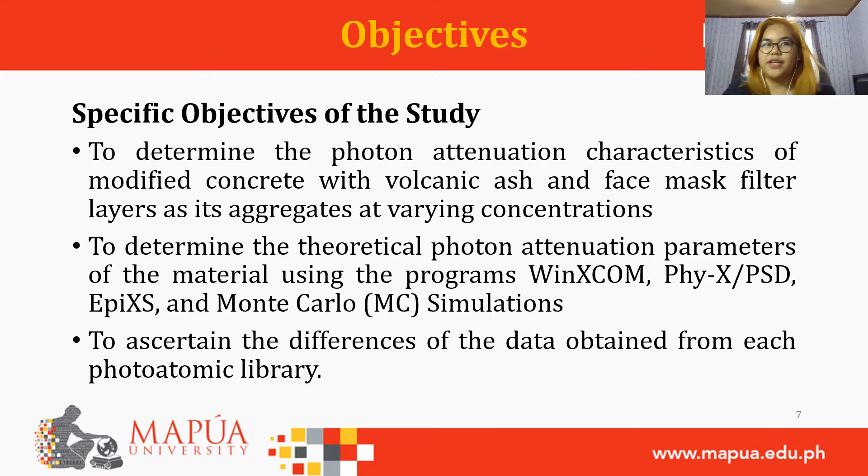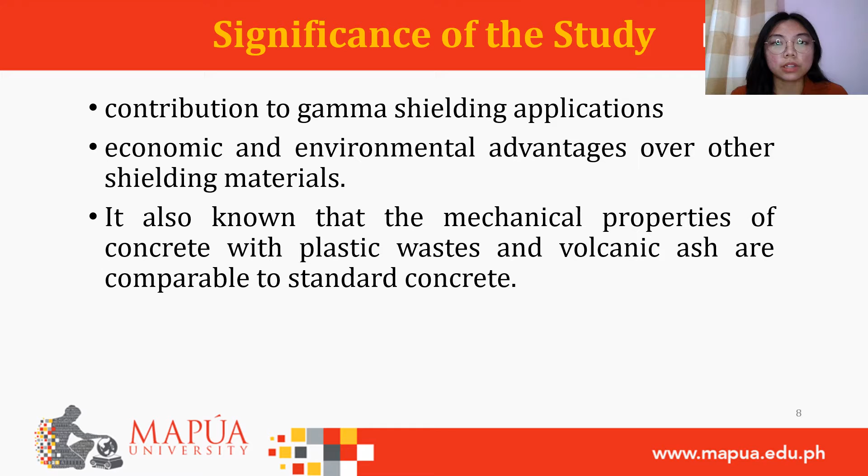This study will have contributions to gamma shielding applications such as in medical and research facilities, due to its economic and environmental advantages over other shielding materials. It has also been proven by previous studies that concrete with plastic wastes and volcanic ash are comparable to standard concrete. Recycling the masks and volcanic ashes will also be beneficial to reduce wastes.

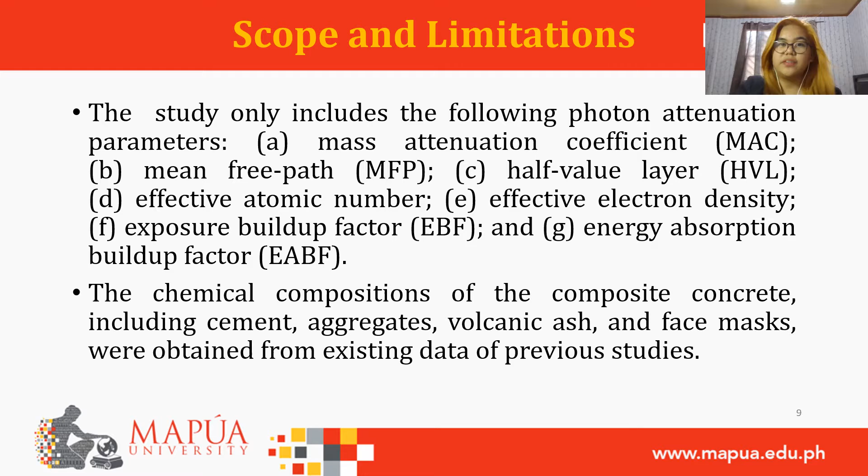The study will only include the parameters shown in the slide. Because of the restriction due to the pandemic, the chemical composition of the proposed material will only be based on the data obtained from previous studies.

The photon attenuation parameters of a material will determine its capability for photon shielding. The parameters are the mass attenuation coefficient, mean free path, half-value layer, effective atomic number, effective electron density, and energy and exposure buildup factors.

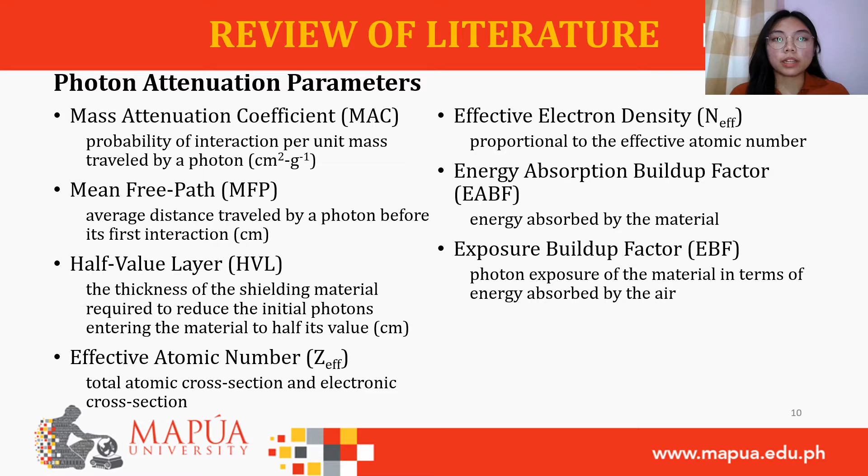In light of the prevalent use of face masks, Kilmartin-Lynch and others investigated the mechanical properties of concrete with face masks. Results showed that increasing the face mask in the concrete mix will increase the compressive and tensile strength of the concrete. However, this is only advantageous up to 0.2%, as there was an observed decrease in strength beyond 0.2% face mask.

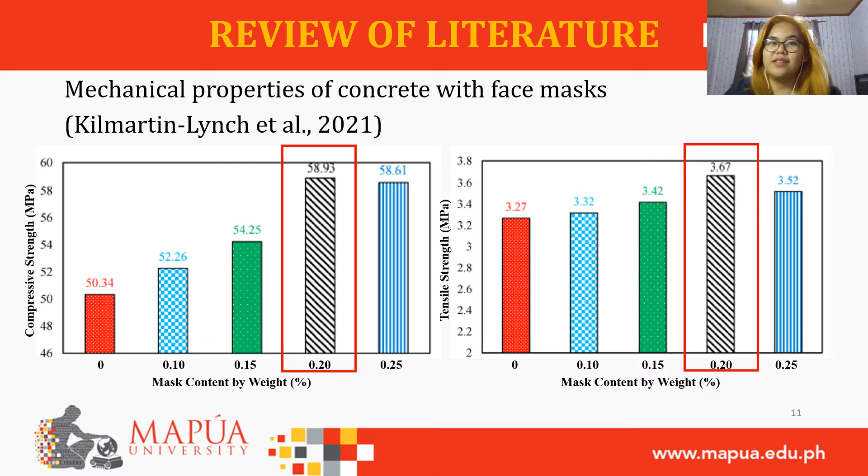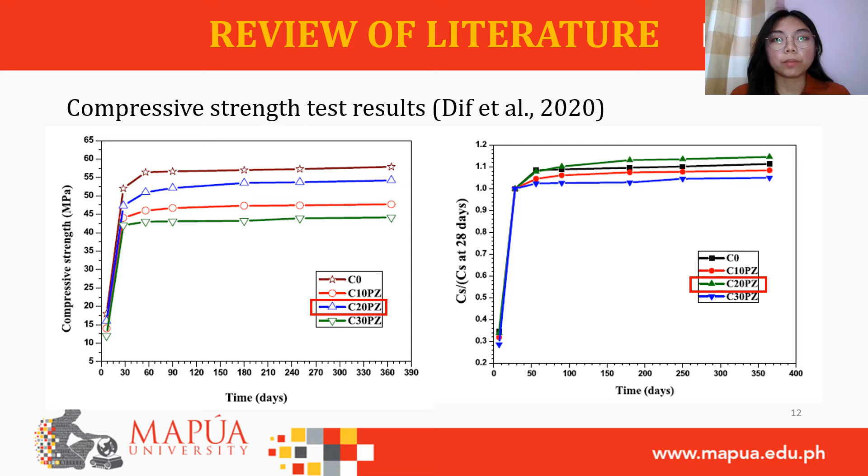A study by Dif and others discovered that adding about 20% volcanic ash as partial replacement to concrete materials exhibited the nearest compressive strength to the reference concrete, while it has the highest strength gain for the period of 28 days. This increase in compressive strength can be attributed to the delayed pozzolanic reaction of pozzolan with cement hydrates, forming calcium silicate hydrates, which acts as a binder.

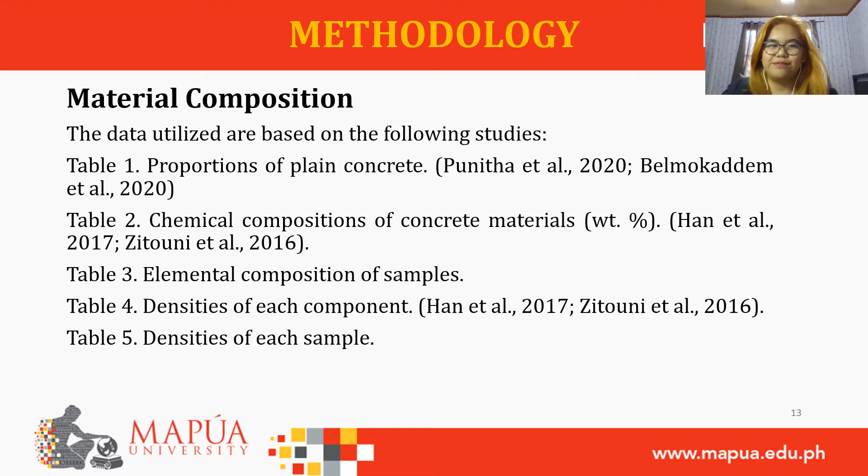The material compositions and densities were obtained from previous studies and were calculated as shown in tables 1 to 5. The parameters previously discussed were determined using the following simulation programs: WinXCOM, Phy-X/PSD, EpiXS, and Monte Carlo simulations. The photoatomic library used by WinXCOM and Phy-X/PSD is XCOM, EPICS2017 for EpiXS, and EPDL97 for MCNP5 code.

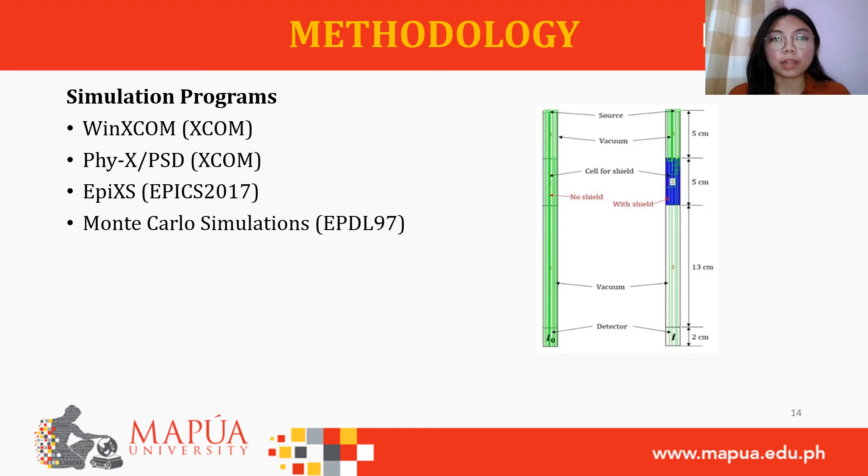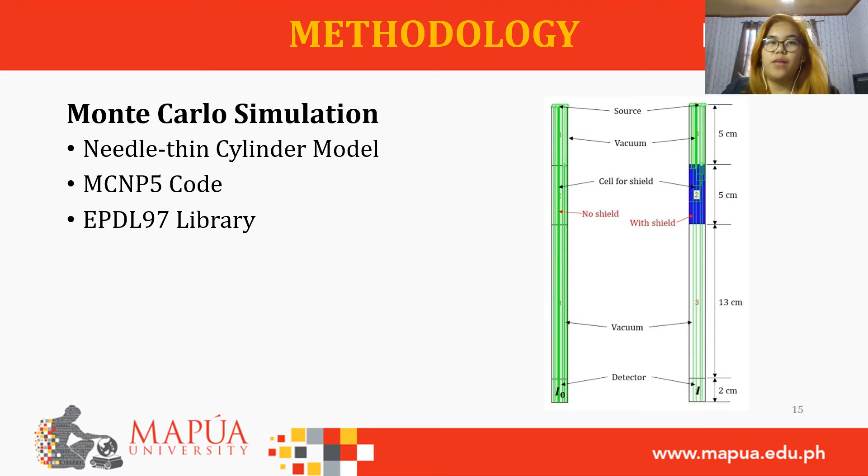For the present study, the MC simulation utilizes the needle-thin cylinder model as shown in the slide. The simulation was done using MCNP5 code, which uses EPDL97 as the library. Considering that the model demonstrates a true narrow beam geometry, the number of incident and emergent photons can be related by the Beer-Lambert law, where mu, or the linear attenuation coefficient, can be calculated.

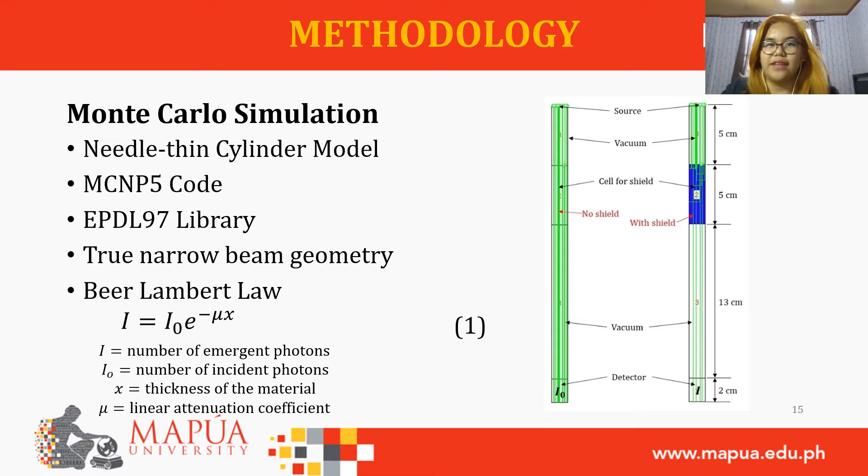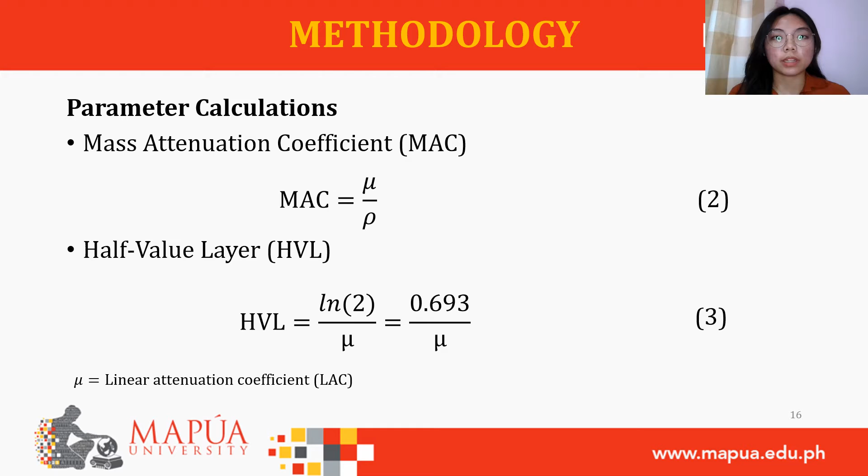The mu is related to the mass attenuation coefficient, which is to be discussed in the following slides. The mass attenuation coefficient can be calculated by dividing the linear attenuation coefficient by the density of the material. The half-value layer can be calculated by dividing the natural logarithm of 2 by the linear attenuation coefficient.

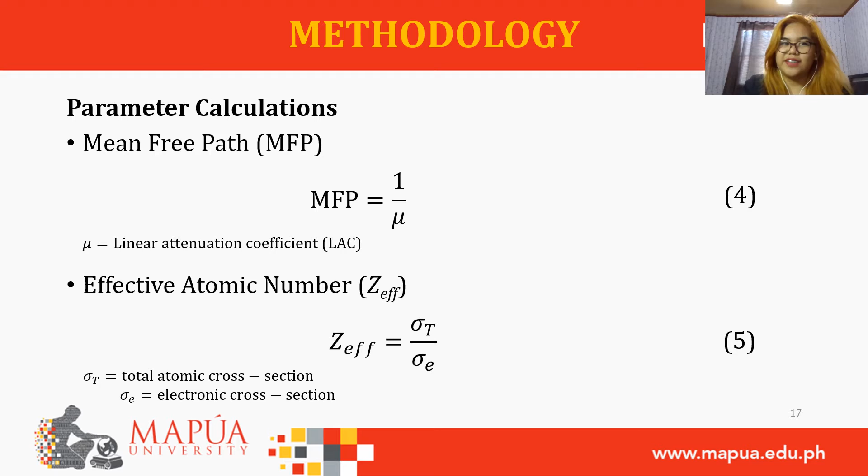Similarly, the MFP can be calculated from the inverse value of the mu. On the other hand, the Zeff can be calculated by dividing the total atomic cross-section by the electronic cross-section. The effective atomic density can be obtained by multiplying the effective atomic number to the ratio of the Avogadro's number to the summation of the atomic fraction times the atomic mass of an element.

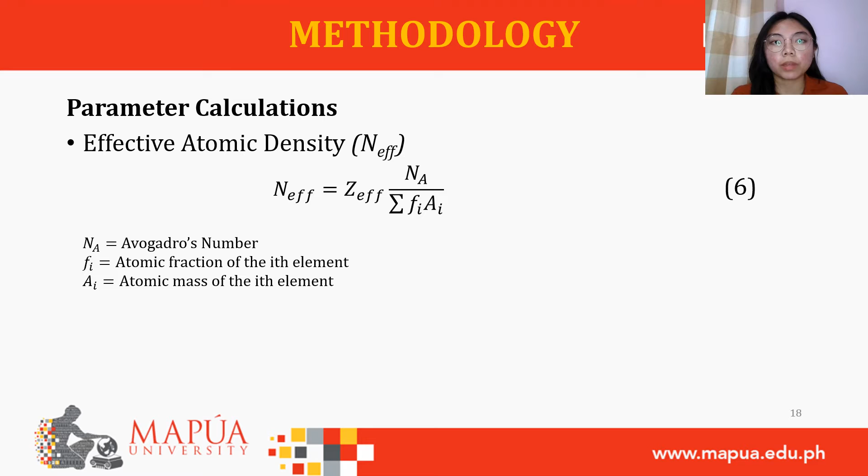Three cases were investigated: increasing volcanic ash composition, increasing face mask composition, and increasing both the volcanic ash and face mask composition. The obtained data for each case was compared to the reference concrete CF00V05 using percent difference. The libraries XCOM and EPDL97 were likewise investigated for their percent difference from the latest library, EPICS 2017. A sensitivity analysis was done using the one factor at a time method on the reference concrete.

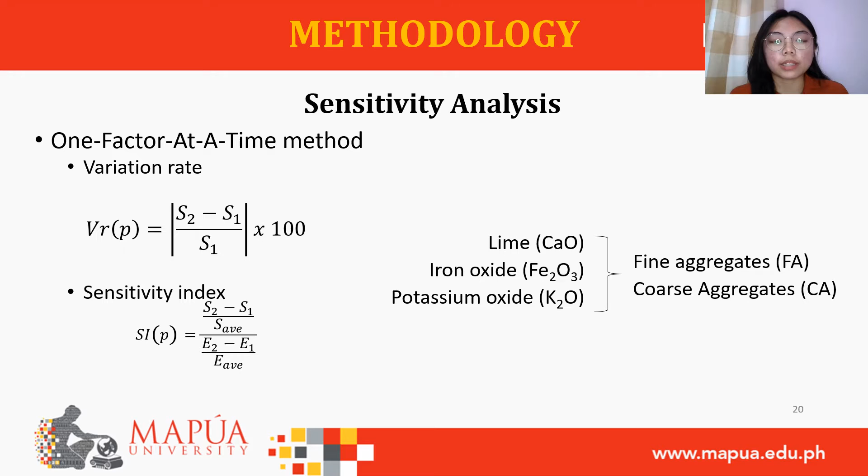The composition of lime, iron oxide, and potassium oxide in fine and coarse aggregates was varied by an increment of plus and minus 20% of their original value. These compounds were chosen because calcium, iron, and potassium have the highest atomic numbers and are expected to have the greatest impact on the MAC of the material.

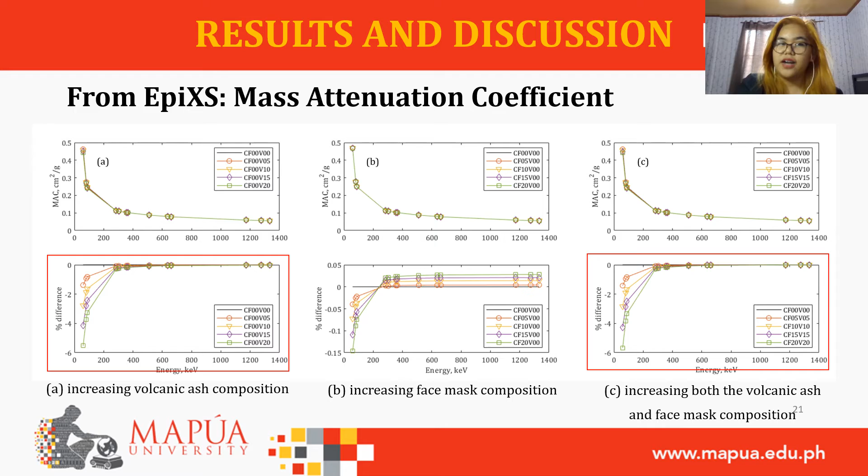The trend and scale of the MAC values are found to be consistent with previous studies of normal weight concrete by Un and others, composite concretes with metal oxides by Tekin and others, and composite concrete with perlite materials by Agar and others. For the MFP, a low value is more desired since it denotes the average distance traveled by a photon before its first interaction.

The MFP of the samples in all cases have a small percent deviation from the reference concrete CF00V00, shown in the second row of the graphs. Also, similar to MAC, the MFP values of samples CF00V05 and CF05V05 are more advantageous below 300 keV, while the samples CF00V20 and CF20V20 are more advantageous beyond 300 keV.

Since the volcanic ash contributes more to the concrete mix than the face mask, increasing both their compositions up to 0.20% face mask and 20% volcanic ash showed an advantage in the high energy region.

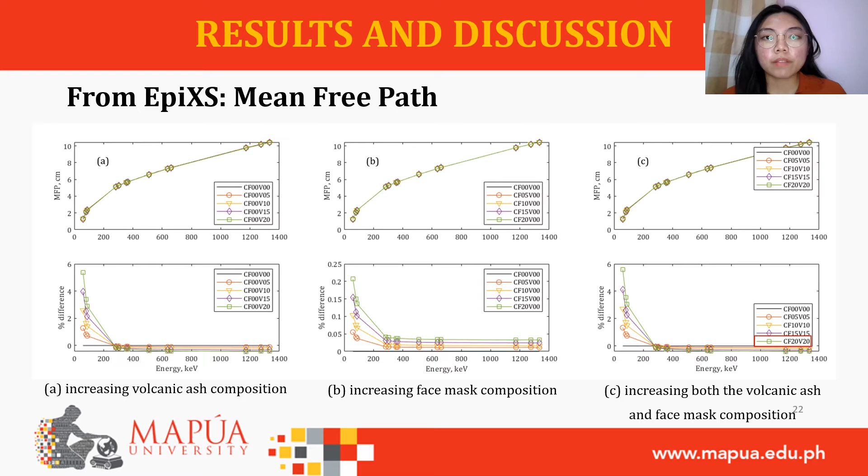Next is the HVL. Since HVL is indirectly proportional to MAC, lower values of HVL are desired for photon shielding applications. As previously explained, cases 1 and 3 depict similar graphs as volcanic ash replacement is more prevalent in volume compared to the face masks. This means that adding face masks to the concrete mix has a negligible effect on the HVL.

This result denotes that increasing the face mask composition in the concrete does not significantly affect the photon shielding capacity of the material, while the mechanical properties are improved in terms of compressive and tensile strength.

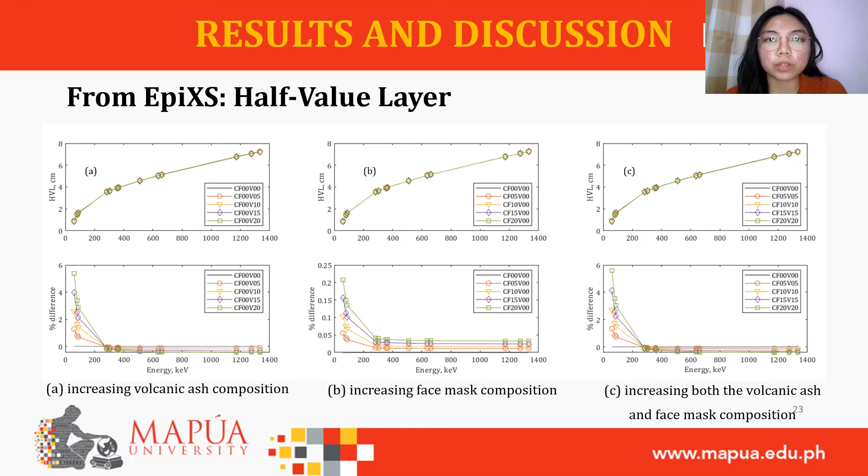Conversely, the Zeff values are highest at low energies for all cases and constant beyond 300 kilo-electron volts. The high Zeff is caused by the photoelectric interaction dominant at low energies, whereas the constant ZF values are caused by pair production interaction at high energies.

Comparing cases 1 and 2, it can be observed that incorporation of face mask has negligible effects on the effective atomic number, whereas volcanic ash has a negative correlation to the ZF. Likewise, the same conclusion can be said for case 3. Nonetheless, the results were comparable to various rocks as previously investigated by Obaid and others in 2018.

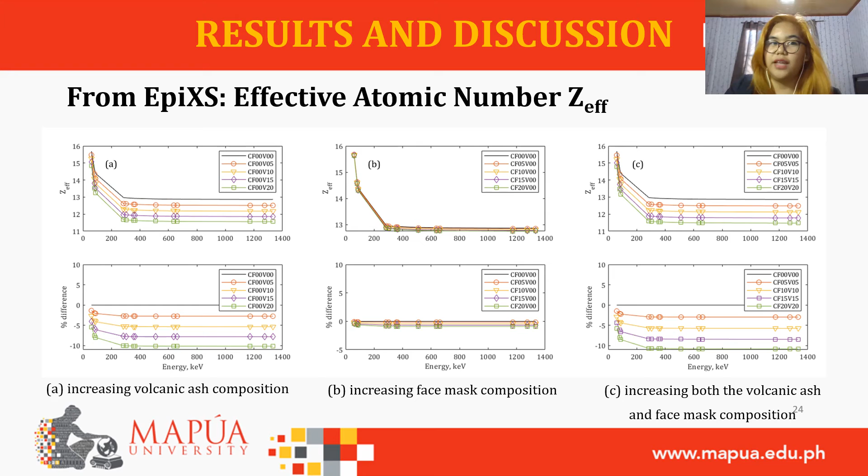Similarly, there were no observed significant differences for Neff at energies beyond 300 kiloelectron volts for all cases. However, at low energies, a high value of NF can be observed, thereby it can be concluded that the material is advantageous at low energies.

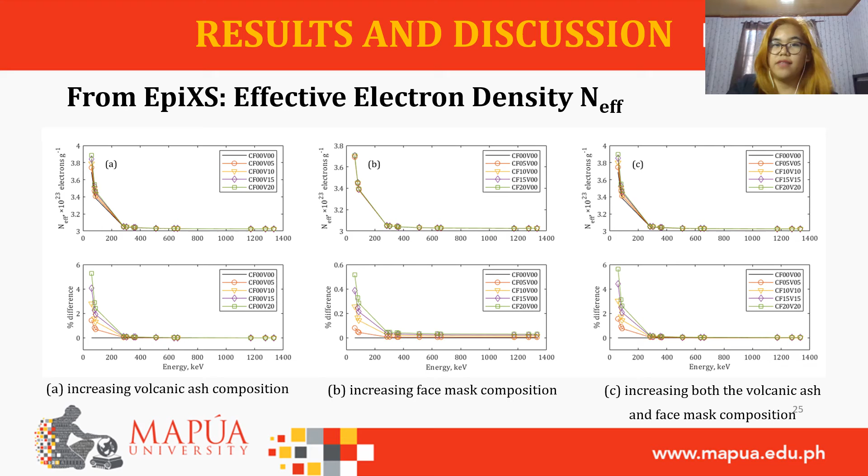The exposure buildup factor of sample CF05V00 at different values of mean free path was obtained. Based on graph A, it can be observed that at all MFPs, the values of EBF at low energies are low, subsequently peaked at about 400 kiloelectron volts, and then went down as the energy increased. These three phenomena can be attributed to the photon interaction dominant at each energy range, namely photoelectric absorption at low

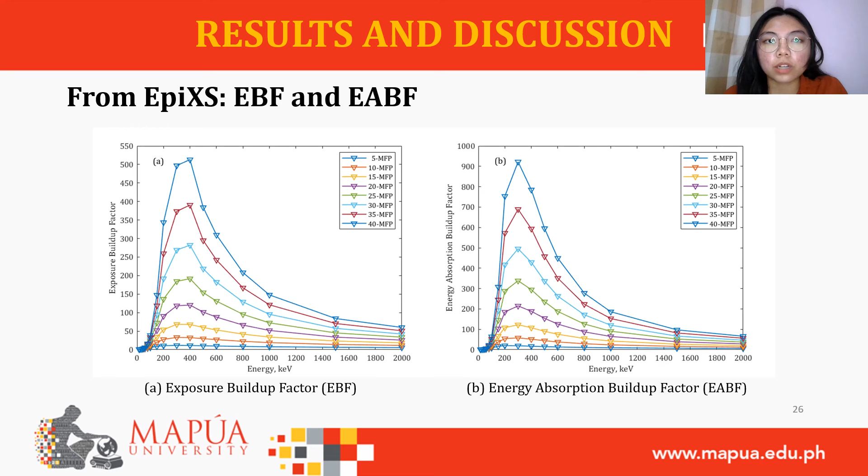energies, Compton scattering at intermediate energies, and pair production at high energies. The behavior of the EABF response at varying MFPs is also almost similar to the EBF response as the photon energy increases. Moreover, an increase in the MFP causes an increase in the EABF and EBF values because the latter is in direct proportion with the scattering volume. In this case, the photon scattering interactions will be more likely to occur, increasing the EABF and EBF values.

Because of the various compounds present in the aggregates, a sensitivity analysis was done to determine which compound greatly contributes to the MAC of the sample. The compounds lime, iron oxide, and potassium oxide in coarse and fine aggregates were investigated, and its variation rates and sensitivity indices are shown in the slide.

As expected in both parameters, iron oxide had the highest impact on the MAC, mainly because of the iron having the highest atomic number among all the input elements. Similarly, potassium oxide yielded the least effect among the three compounds because of the low atomic number of potassium compared to calcium and iron. Furthermore, varying the oxides in fine aggregates was found to be negligible, with the value of the potassium oxide being closest to zero.

This is because fine aggregates have smaller weight percent in the total concrete mix compared to coarse aggregates.

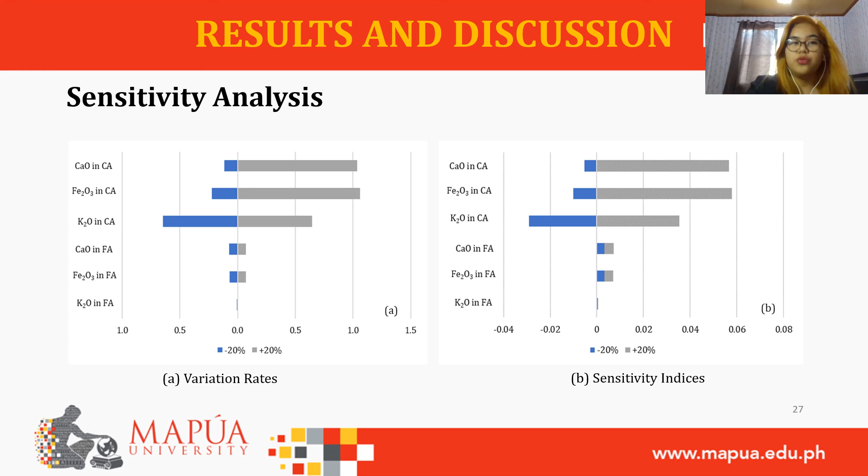Aside from that, it is also worth noting that the values of the percent deviation ranges only from 0.01% to 0.32%. After conducting the simulations and analysis of the data, several conclusions can be drawn from the study.

The study used WinXCOM, Phy-X/PSD, EpiXS, and Monte Carlo simulations to obtain the MAC values and other photon shielding parameters of the sample concrete. The MAC values of the concrete samples exhibit minor deviations from the reference concrete at energies beyond 300 kiloelectron volts. Based on the sensitivity analysis done using one factor at a time method, increasing the amount

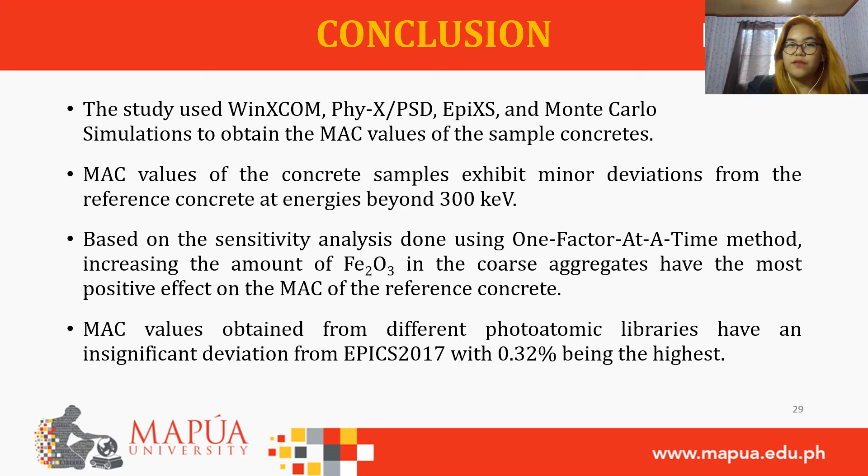of iron oxide in the coarse aggregates have the most positive effect on the MAC of the reference concrete. Lastly, MAC values obtained from different photoatomic libraries, such as XCOM and EPDL97, have an insignificant deviation from EPICS2017, with 0.32% being the highest.

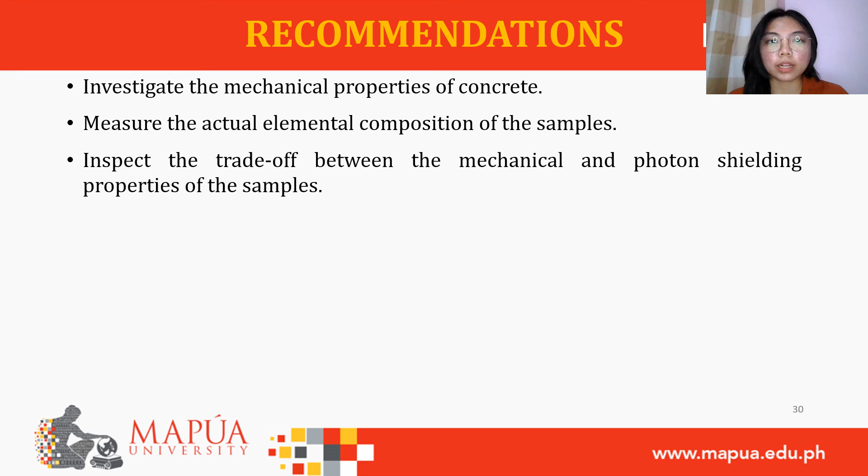For future studies, it will be advantageous to investigate the mechanical properties of concrete, such as compressive, tensile, and bending strength, alongside the photon shielding parameters through experimentation. Measuring the actual elemental composition of the samples will also be helpful in the comparative analysis of experimental and analytical data. Investigating the trade-off between the mechanical and the photon shielding properties will further determine which component or element will be most influential.

In light of the waste generated from the COVID-19 pandemic, examining the plastic composition from face shields as a possible replacement for coarse aggregates of the concrete will be environmentally and economically advantageous. However, it is also necessary to consider the disinfection of these wastes, as they are hazardous.

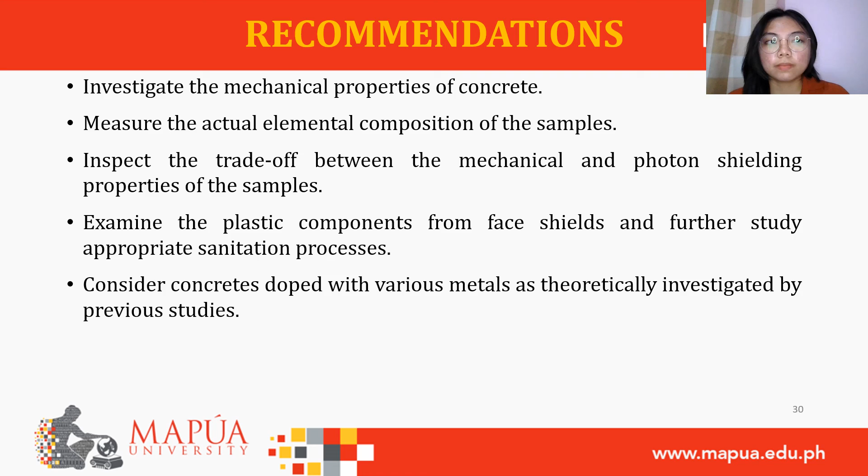It will also be better to consider concretes doped with various metals such as strontium, zirconium, as theoretically investigated by previous studies. This marks the end of our presentation. Thank you for listening.